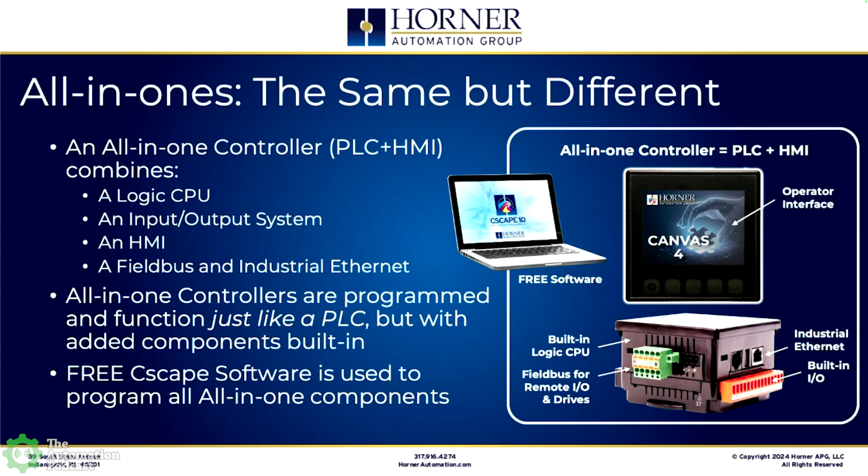All right, you ready to dive into Cscape and Canvas there, Shawn? Oh, yeah, absolutely. All right, here we go.

If you take a look at our all-in-one controller lines, or our PLC plus HMI lines, we have three major lines. Our entry-level product line is called Micro OCS. For any simple machine, simple application, the Micro OCS is a great choice because it's very cost-effective but very capable. Kind of the bread and butter of our product line is our XL series, which was just updated to the XL Prime, and it can handle just about any machine control application out there. But the latest controller line, and the one I'm going to talk about today, our new high end if you will, is called Canvas. And what makes Canvas unique is what we're going to talk about next.

So what is it about Canvas that makes it different from our other all-in-one controllers, and maybe different from our competition's all-in-one controllers, or even PLCs for that matter? First of all, there are three primary differentiators with Canvas when you compare it with other all-in-one controller lines, specifically when you compare it with our other lines from Horner.

First of all, we have something called an advanced graphics engine. One of the things we really wanted to amp up with Canvas was the graphics capabilities, the graphics objects and tools available to system designers when they're programming our product, configuring their machine using the graphics available in Cscape 10. We wanted to amp that up a bit. So we have a completely new advanced graphics engine, and a lot of the graphics objects have been rewritten from the ground up with new capabilities and a whole lot more from a graphic standpoint.

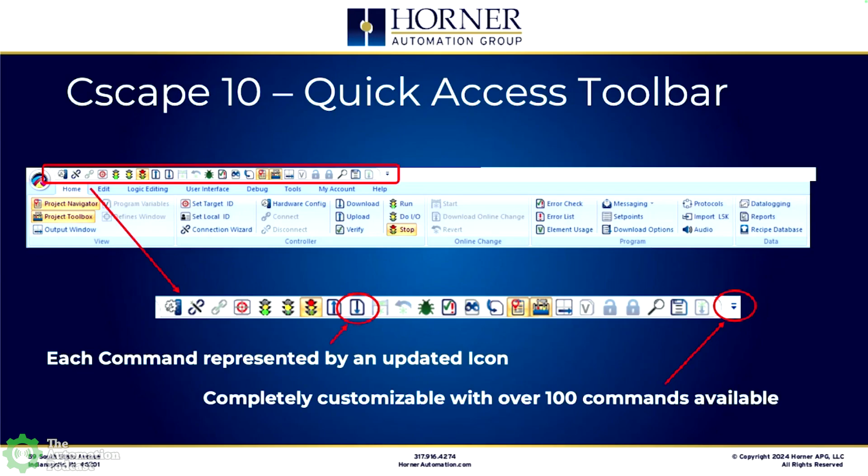Okay, now let's talk about the way that graphics are edited in a little more detail than what I mentioned earlier on the summary screen. So again, with Cscape 9 and earlier versions, when you went to edit a graphical screen or a series of graphical screens, the graphics editor kind of took over the entire desktop, so you couldn't edit logic without closing that graphics editor portion of Cscape first.

With Cscape 10, whenever you're editing a new screen, it shows up as a tab right alongside another tab where you might have your main logic block, or a subroutine or user-defined function block that you're working on. So it's really right alongside everything else. And then you've got a host of other graphics tools available, a graphics toolbox that's new, that will allow you to more quickly access the objects you want as you're developing your screens, and to be able to quickly change gears back to your logic if that's what you need to do, just by clicking on another tab.

Yeah, I'm just going to jump in here for the audio audience. Just want to say this looks extremely modern. So if you're using modern software from another vendor, I think you're going to feel right at home here. I do love all the toolbars and how you can customize that toolbar like we talked about in the last slide. But I just wanted to jump in here really quick, Chuck, and just say that for the people listening, it looks like a very modern package.

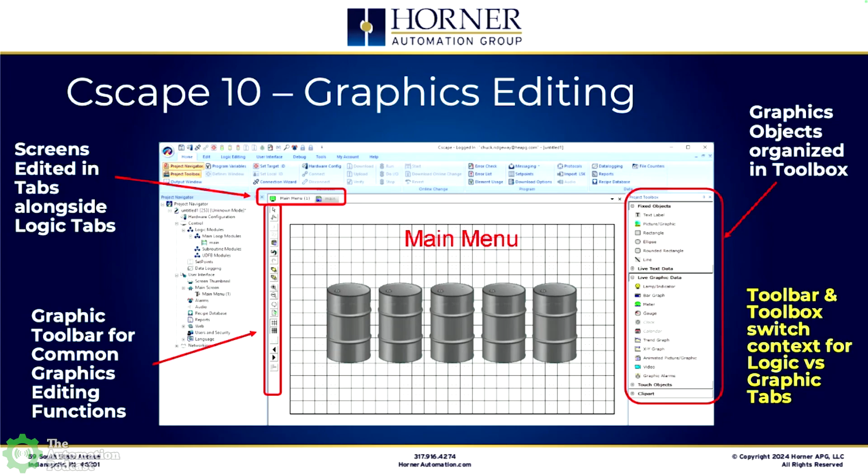Yeah, I think like with any other change for our existing users, there's going to be a little bit of getting used to. But I think what they'll find is as they work with the new version just for a little while, they're quickly going to be just about as efficient, if not way more efficient, than they were before. So I don't think the transition time will be too severe. It really wasn't for me - within a couple weeks, I was able to undo 30 years of habits from the previous version. Well, and I think we all had our heartburn going in Microsoft Office to the ribbon toolbar, and thank goodness that's way in the past now. So I think more of us would probably be able to accept this quicker than maybe we would have done 10, 15 years ago.

Sure. One of the updates we've done to Cscape 10 from a graphic standpoint is we've added a bunch of free industrial images in an image library that's built right into Cscape. This is available no matter which OCS controller you're using - pipes and valves and pumps and all those sorts of things. There's a few hundred industrial images available for you to pull in, included in the free version of Cscape, that weren't there before. So again, more options to kind of mimic your process a bit, you've got more options there.

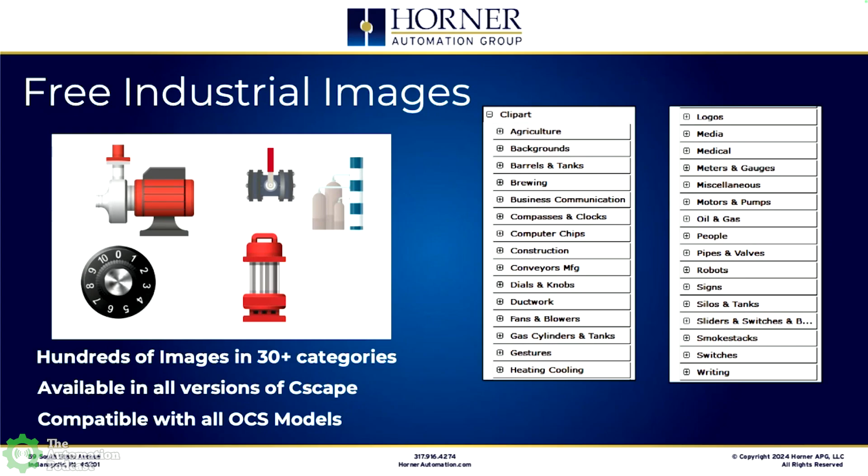Now, we've always supported, at least for the last 15 years or so, the symbol factory from Software Toolbox. So that's a plugin that effectively you can order or download from Horner with a $99 charge.

You can include Cscape with the symbol factory built into it. So with Cscape 10, not only do you have access to all the free symbols we've created—I guess we'd call them industrial graphics—but also you still have access to the symbol factory, the thousands and thousands of images that industrial manufacturers have taken advantage of over the years by partnering with Software Toolbox. That continues for Cscape 10, for a $99 fee if you want to take advantage of it.

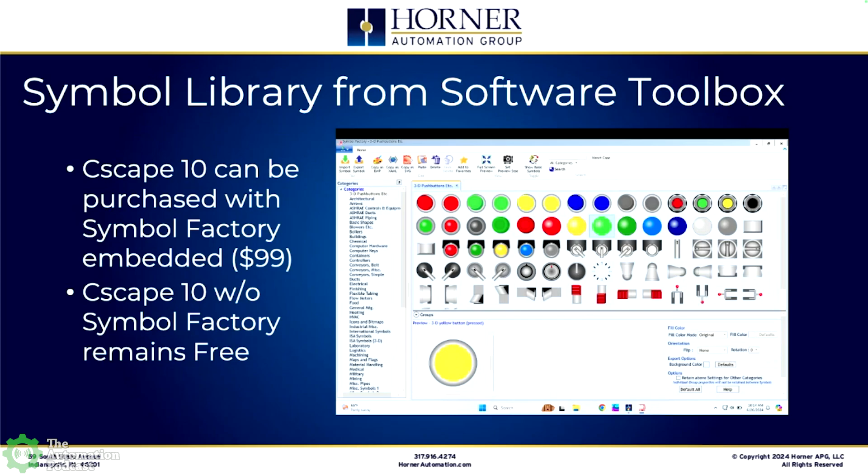The different types of image files you can import, your control over their background, and support for motion GIFs and PNG transparent files—those sorts of things have all been added with Cscape 10. So that's a big change there.

For all graphic objects you use with Canvas, anytime you're editing a Canvas project or screen and you place graphic objects on it, you can take advantage of what we call enhanced attributes. So any object you place on a Canvas screen can be controlled dynamically at runtime—its height, width, X coordinate, Y coordinate, rotation, opacity—all controllable at runtime. That's not totally unique; it's something we've had for years, especially with SCADA packages, but now we've updated Canvas to include that functionality.

So you have access to all those enhanced attributes at runtime. With any Canvas object, whether it's a push button, a data field, or whatever, you can create a custom background for it. It could be an image you import, or one of several pre-selected patterns. You've got almost an unlimited choice for a custom background on any Canvas object.

Now, Chuck, I want to interrupt for a second to make sure I'm understanding it. No matter which of the supported products you use Cscape 10 with, you're going to get some features—even if you're not using the latest Canvas, you get the updated software that looks modern with the ribbon and all the different menus. You're also going to get more graphics for free, like 200, no matter which package you're using. That's right. But then we switched over and said, okay, now these are some of the Canvas-specific features with the new engine.

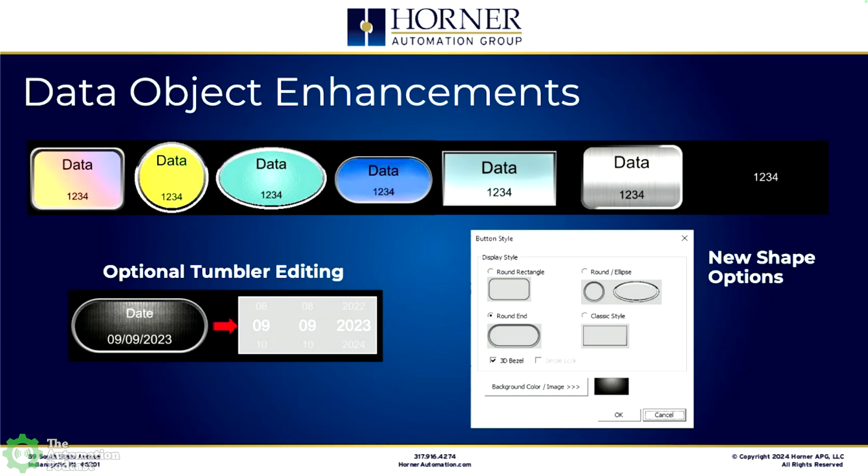So some of the simpler devices have been enhanced too. Data objects where you're displaying process variables or set points now have more options than before. There's now the ability to let your operator edit a data field using a tumbler—the type of control you'll find in some cell phones for editing time and date and similar options. If you want your operator to edit a date or time using a tumbler, that's supported in editable Canvas objects. And with our other simple objects—indicators, push buttons, toggle switches, multi-position switches—there are more options available than before, different graphics, those sorts of things. Just routine updates, like you'd expect.

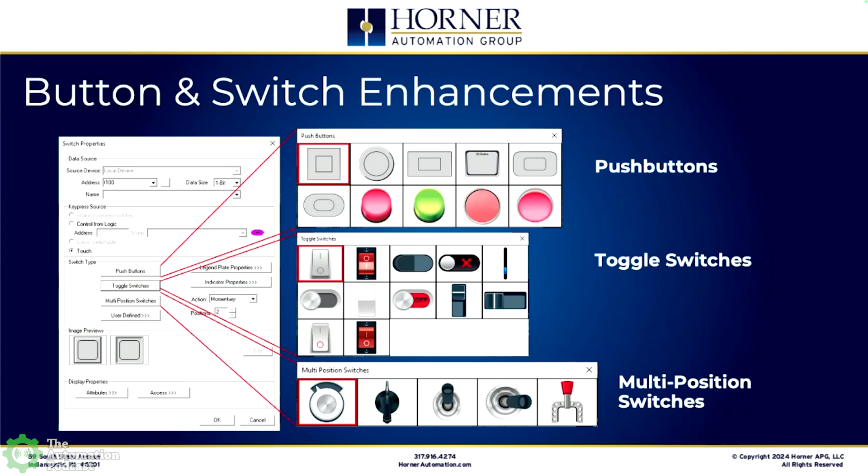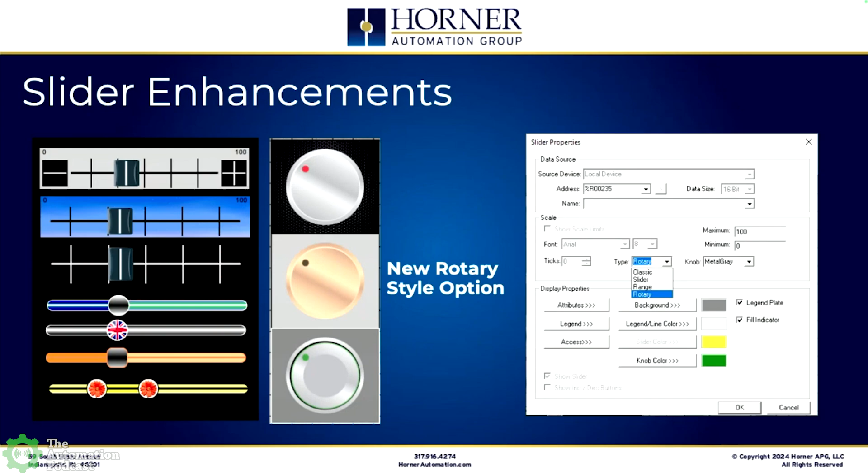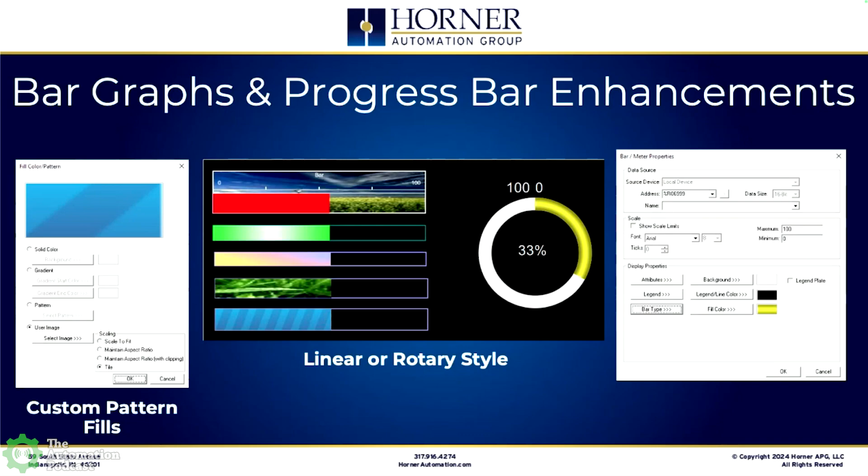Bar graphs and progress bars have been enhanced with more graphic options and custom image imports, and all those sorts of things. Just like with the slider object, we've also got a rotary style progress bar as well, so it doesn't have to be strictly linear anymore.

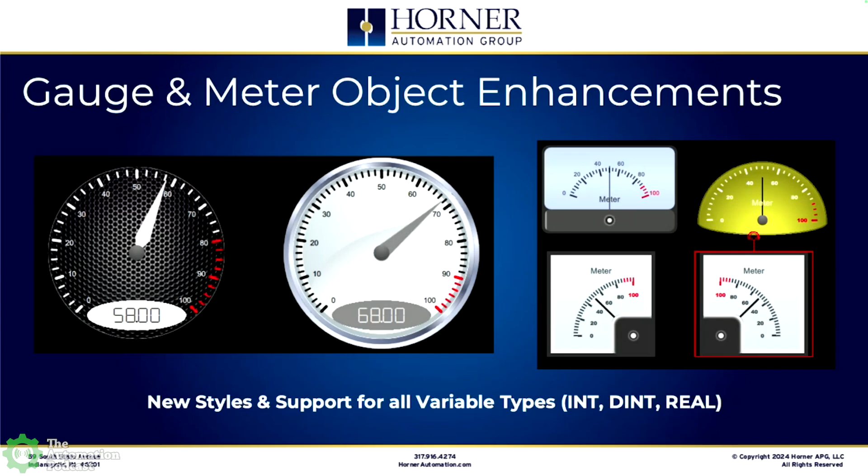For gauges and meters, those have all been updated with new graphic options. One thing that's definitely an upgrade is that with our other controller families, if you're using a gauge, you might be locked into strictly an integer type variable being mapped to that gauge. Whereas with Canvas, any type of variable, floating point, integer, double integer, it doesn't really matter. Even long reals can be supported with a gauge or meter type object. So that's one of the enhancements, more flexible support for different types of variables tied to different graphic objects.

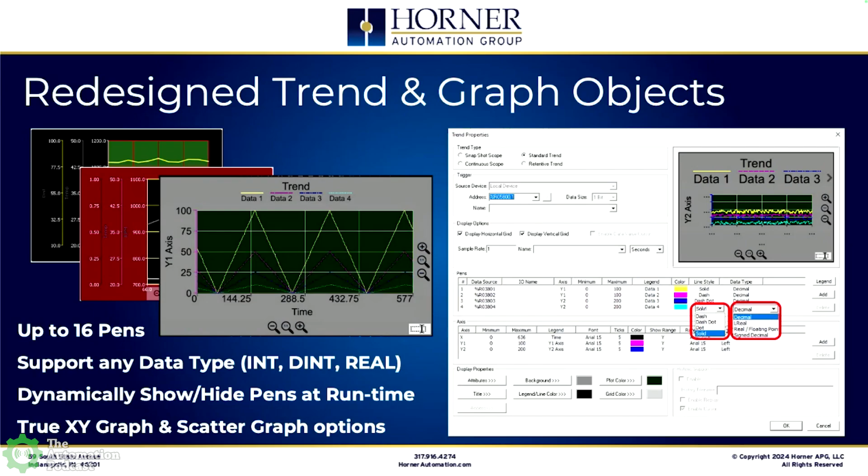That's important. We've supported something we've called XY graphs, but it wasn't a true XY in the past, because the points were always evenly distributed over the x-axis. With the true XY graph, you have an x variable and a y variable, and you could have multiple y variables actually, and those points are just graphed via the x and y coordinates. They are not necessarily evenly distributed over the x-axis like they might have been in the past with a non-true XY graph.

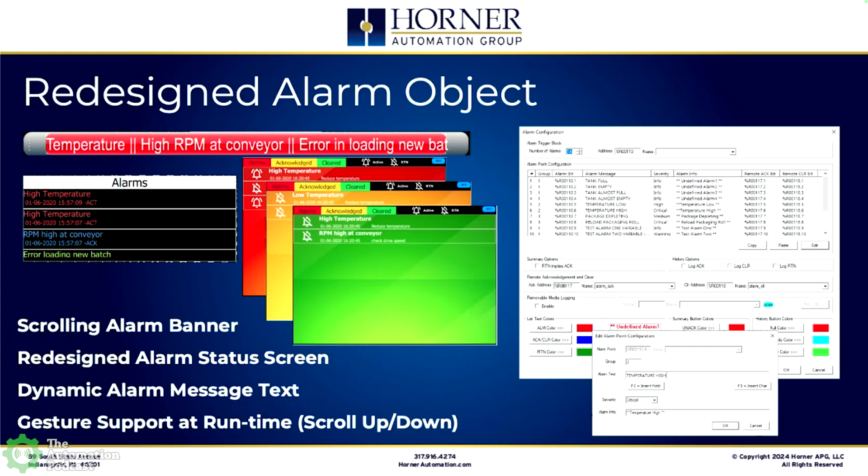If you have an alarm list the operator needs to go through, maybe a history list, they have the ability to scroll with their finger like they'd expect on a cell phone. That's one of the gestures supported, scrolling up and down through an alarm history list, for instance. So the alarm object for Canvas has been completely redesigned.

The recipe object - we've had support for recipe management for years, but we've kind of said to the system designer, design your own recipe display, the way you want to display the ability for operators to select the product they want to run, or select the ingredient they want to modify for a particular batch. With Cscape 10 and Canvas, we've got a configurable, predefined recipe object.

So the user still has a lot of flexibility in terms of how they display it to their operator, but now they just check the options that they want. Do I want to have a scrollable list of products that I can scroll up and down through as an operator, as I'm deciding what product I'm going to run next? Do I want to have the ability to scroll left to right through the different process variables or ingredients that make up the variations that cause different products to be made?

Those sorts of things. And then there are also some integrated operator buttons. You don't have to create those; they're already there for loading a new recipe, maybe saving a modified recipe, creating a brand new recipe, all those sorts of things. Those buttons are already available on the screen and can be disabled if that's not a feature that the system designer wants to make available to the operator.